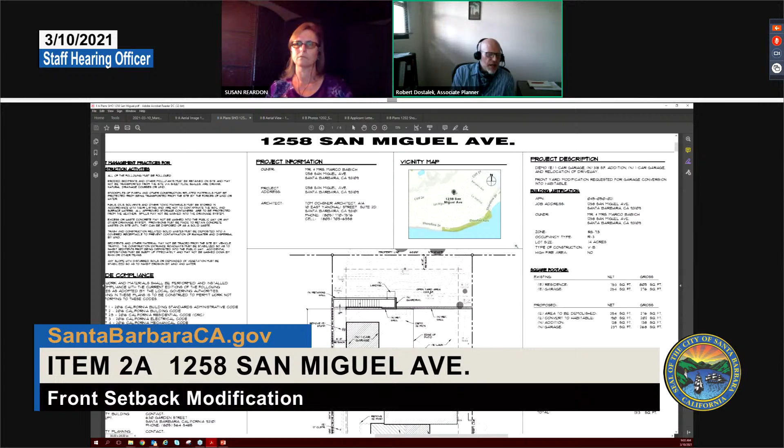Just a little background, if we could focus on the site plan for a moment. The site is currently developed with a 753 square foot single unit residence and an attached 254 square foot single car garage. The attached garage and covered entryway are non-conforming as they encroach approximately 5 feet into the 20-foot front setback.

If we could zoom in a little bit on the footprints of the buildings. The project involves demolition of the existing one-car garage and covered entryway for the construction of a new 318 square foot addition to the residence. The proposal also includes a new detached 237 square foot one-car garage, relocation of the existing driveway, a new retaining wall with staircase, and the removal of one street tree.

The new addition and garage, as you can see, are illustrated with hatching. The new addition would be situated in the same footprint as the existing garage and entryway. The retaining wall and stairwell are included to access the steep rear portion of the lot and to keep the option open of a potential future ADU above the garage.

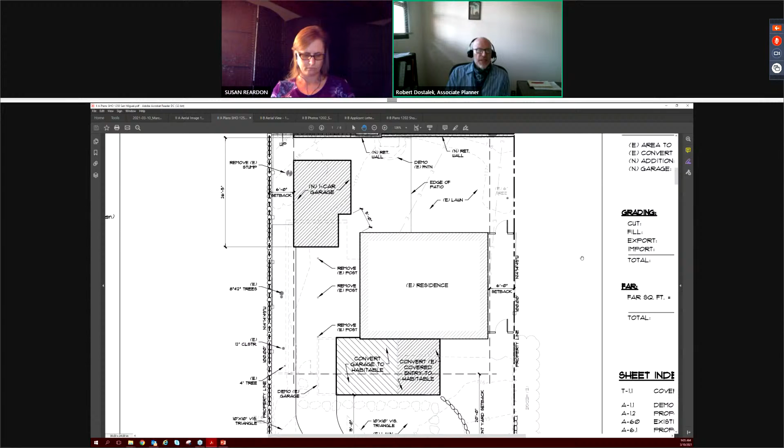For basic zoning and general plan, the project site is zoned E3 SD3 under Title 28 of the Municipal Code. The coastal land use plan designation is residential with a maximum of 5 dwelling units per acre. The properties surrounding the project site are all zoned for and developed with residential improvements. For general zoning consistency, the project would adhere to applicable building height, open yard, and parking standards.

To touch on the street tree, a Mexican fan palm street tree is located in the San Miguel Avenue parkway and is proposed to be removed to accommodate the proposed new driveway relocation. The Street Tree Advisory Committee approved the removal last June, and staff has added a condition to require a replacement tree in a suitable location within the vicinity of the project site.

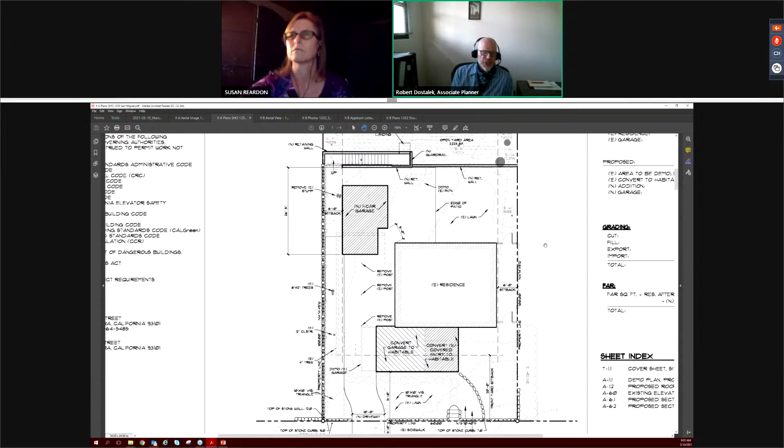To get into the modification a little more, Mr. Russell, perhaps we could go to the floor plan, which is sheet A 1.1.

The existing attached garage and covered entryway encroach into the 20-foot front setback by 5 feet. The proposal involves demolition of these two elements to construct a new 318 square foot addition to the residence. The front setback modification was requested to allow the new habitable floor area to be reconstructed in the same footprint as the garage and entryway, maintaining the same 15-foot setback from the front lot line.

The existing garage structure would be fully demolished to accommodate an architectural roof line more uniform with the existing residence. To replace the removed covered parking space, a new conforming 237 square foot single car garage is proposed in the western rear portion of the property. The existing driveway and curb cut would be vacated to create a new curb cut and driveway leading to the new replacement garage.

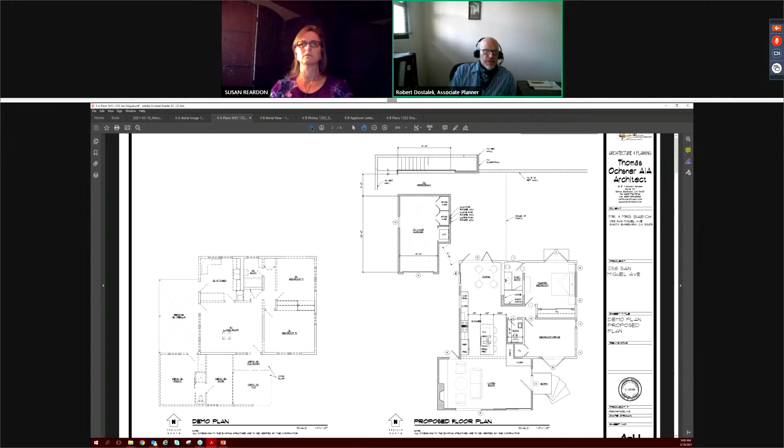If we could toggle back to the site plan for a moment, please. Staff is supportive of the front setback modification, as the proposed addition conversion to habitable space would occur roughly within the same footprint as the existing garage and entryway. Compared to the existing, the footprint of the new addition on the western side would be reduced by about 4.5 feet to accommodate the new driveway approach to the replacement garage. The new addition would result in similar perceived bulk and massing within the front setback, and additionally, the proposed roof alterations would present a more uniform design of the residential structure.

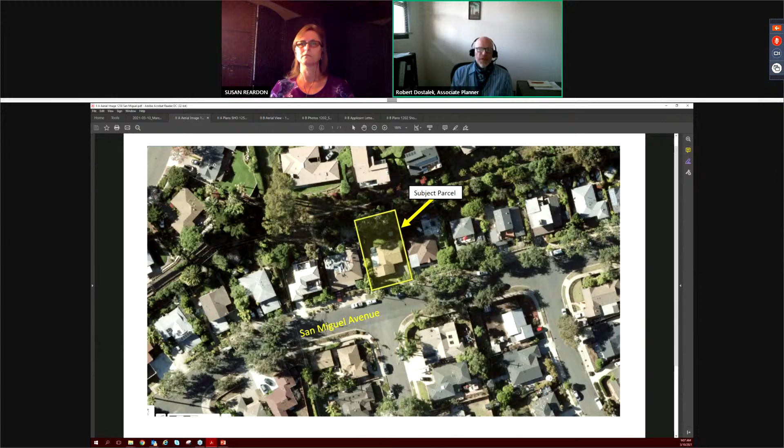There should be an aerial view of San Miguel Avenue in the— yes, thank you. This is a good illustration. As shown here, the reconstruction within the setback would result in a continuation of the established setback theme of other existing residences on the north side of San Miguel Avenue. This is largely due to the significant upward slope in the rear portion of these lots.

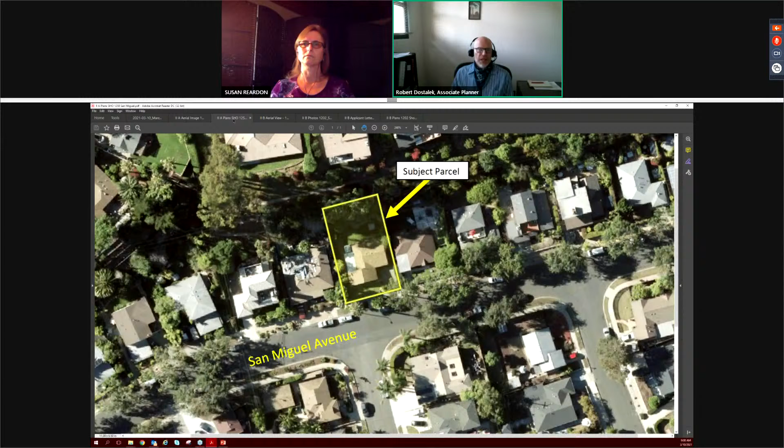Moreover, at 753 square feet, the existing residence is modest in size, and the addition would enhance the livability of the residence. Lastly, the project would relocate the prominent garage and driveway features currently located in the front of the lot to a less conspicuous location in the rear portion of the property.

For design review, the average slope of the lot per city data is 32%. However, the site is not located in the Hillside Design District, so the proposed new addition and garage do not trigger design review. However, the retaining wall proposed behind the garage exceeds 6 feet and is subject to design review by the Single Family Design Board. But due to its limited visibility from San Miguel Avenue, staff is comfortable handling the design review for the retaining wall and stairwell safety guardrail at the top administratively at the building permit stage.

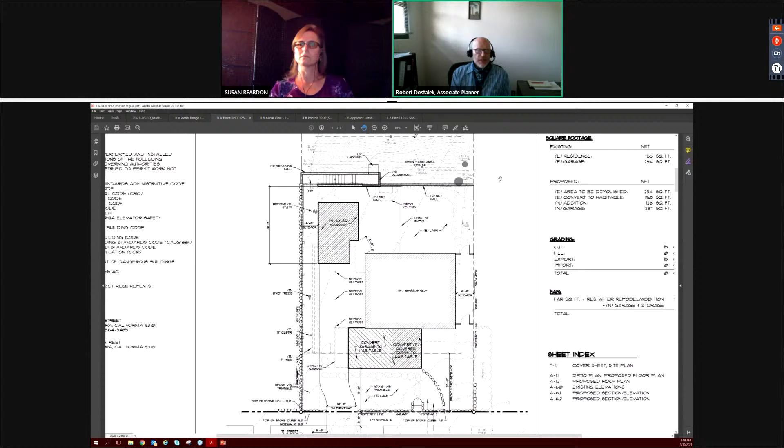For environmental review, the scope of the entire project can be found categorically exempt from further environmental review under sections 15303 and 15305 of the California Environmental Quality Act. To sum up, with the ability to make the findings for the front setback modification, staff recommends the staff hearing officer approve the project with the added condition. That concludes staff's presentation.

Great, thank you. I have no questions right now.

Mr. Ochsner, if you'd like to turn on your webcam and your microphone and provide any additional comments you may have. I thought that was a great presentation by staff. Robert, thank you. I'm available for questions.

Okay, great, thank you. I do have a question regarding the existing driveway. The plans do note that the driveway will be removed, so I assume that means the curb cut, and does it also mean the existing asphalt?

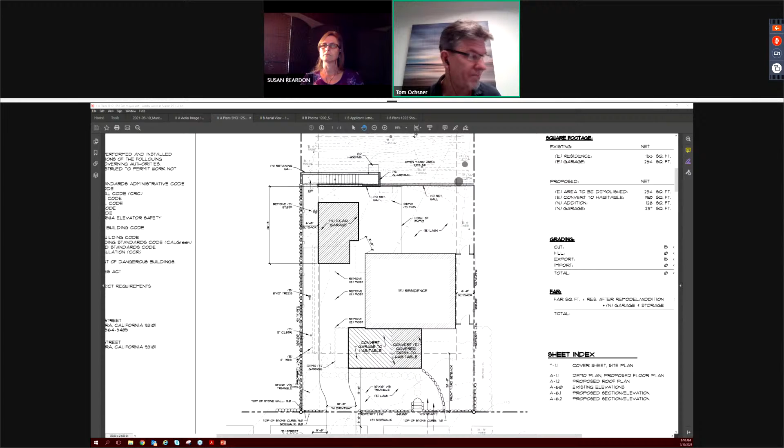Yes, so we don't have an application into transportation for the road encroachment permit yet. We do have a landscape architect that is coming on, but that curb cut will be removed, and the frontage will be restored in conformance to the transportation department's recommendations.

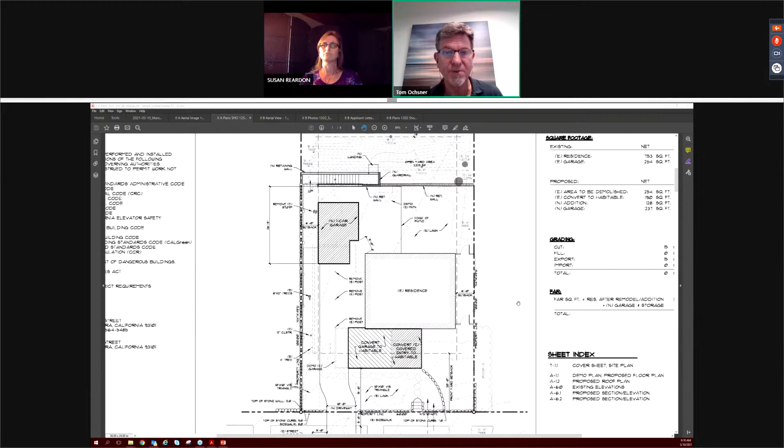Okay, and then what about the driveway paving on the private property? Yes, that will be removed, and a landscape architect is looking at that now. We do intend to turn that into an entryway, so it'll be landscaped in accordance with what the front of the house might want. Okay, great. Thank you. That's all my comments right now.

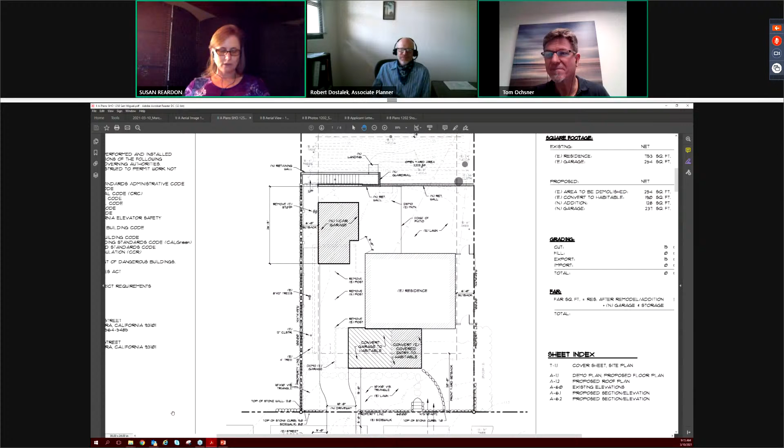Mr. Ochsner, have you reviewed the condition staff proposed in the staff report, and do you understand and agree with it? Yes, I see your head shaking. Yes, we do. Okay, great. So with those two added conditions and the originally proposed condition by staff, I can make the finding as outlined in the staff report and approve your project.

My action is appealable to the Planning Commission within 10 calendar days, and they also have overview authority of all my actions. If they felt this warranted additional review before them for some reason, they could appeal it up, or they can call it up during that same 10-day appeal period. And if either of those would happen, Mr. Dostalek would contact you.

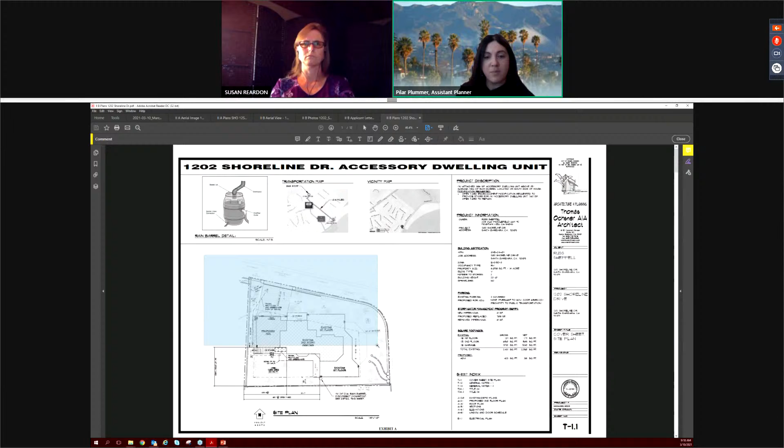In general, accessory dwelling units are under state legislation and are typically reviewed ministerially. However, in the case of this project, we are looking at it as a discretionary hearing and a public hearing due to the open yard modification request associated with the stairs. The project does include new stairs that will encroach into the existing open yard area. The property currently contains 1,260 square feet of open yard area, which is consistent with the zoning ordinance in Title 28. However, the stairs that provide access to the accessory dwelling unit will encroach an additional 98 square feet, which will reduce the existing open yard area to 1,162 square feet.

Staff is generally supportive of the open yard modification request to allow the reduction of the open yard because the encroachment is relatively negligible and it serves the purpose of accessing the accessory dwelling unit. In addition, the proposal conforms to the city's accessory dwelling unit ordinance that allows for the open yard to be 800 square feet with 15 by 15 dimensions on lots of 6,000 to 7,999 square feet. Although this ordinance is currently only in effect in the inland areas of the city, it was approved by City Council citywide and is anticipated to go into effect in the coastal zone after certification by the Coastal Commission of this local coastal plan amendment, anticipated in summer of 2021.

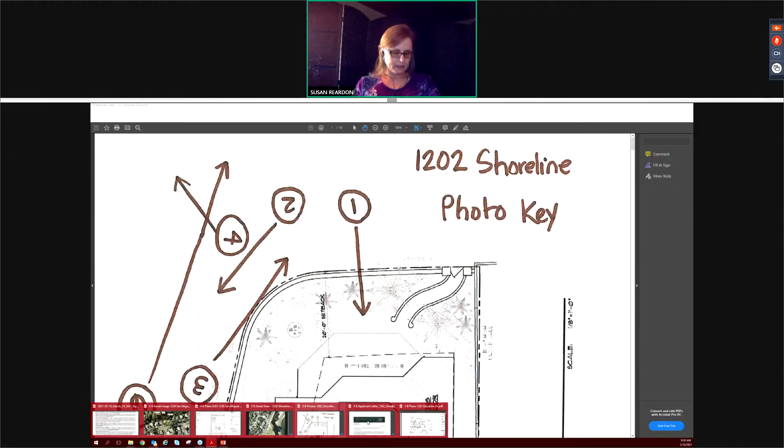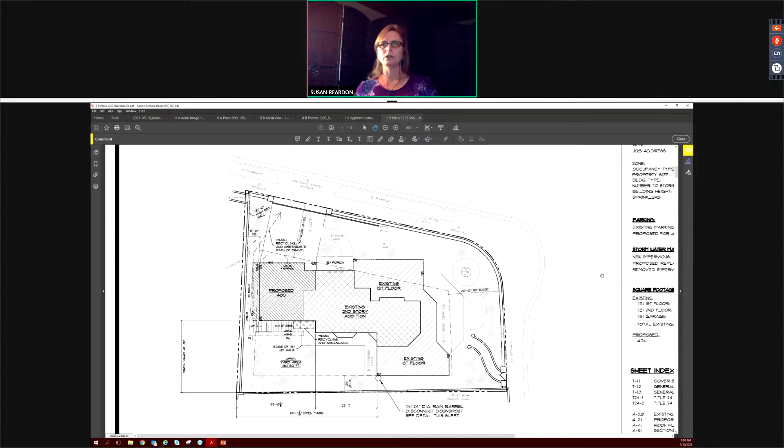Okay, great, I will close the public hearing. I went out to the site and looked at the property, and in regards to the ADU, as I stated at the intro of the public comments, the state has taken away a lot of the city's authority over ADUs in the interest of providing additional housing to residents of the state. Mr., if the staff and the applicant would like to turn on your webcams, I can see you.

Great, thank you. So a lot of the issues regarding the ADU are not relevant at this time. And in addition, the private view easement is a private matter, so that's something I won't weigh in on, given it's private, and also given that I have no authority over the ADU.

My hearing today is in regards to the requested open yard modification with the access stairway encroaching into the open yard. The extent of the encroachment is very minor, as staff said, it's less than 100 square feet, and the end result of the open yard area is still about 93% of what's required. So the request is modest in scope, and it is consistent in that it provides an adequate area for open yard on the site.

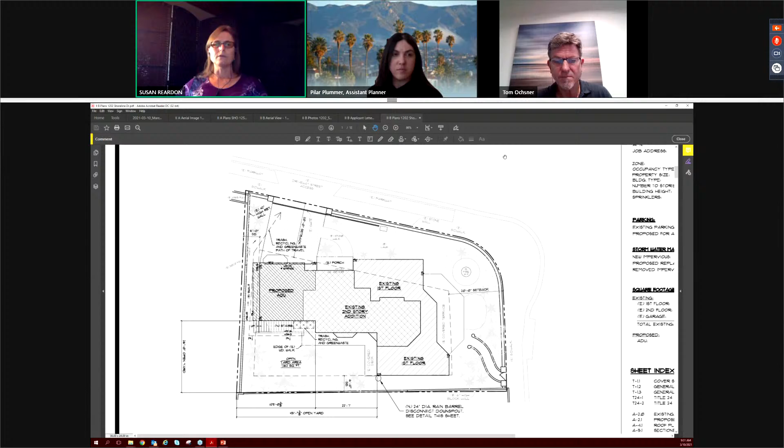In addition, this property is located across the street from Shoreline Park, which provides additional area for outdoor enjoyment.

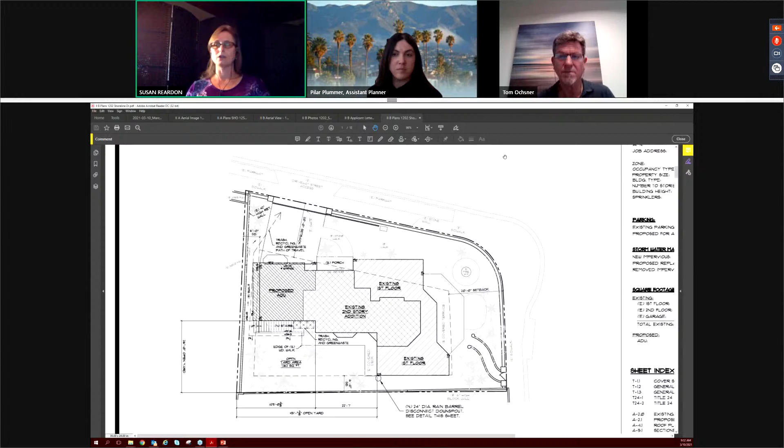With that, I can make the findings outlined in the staff report and approve the project. Staff did not propose any conditions of approval in the staff report, and I don't need to add any conditions of approval in order to grant the open yard modification. So your project is approved as submitted.

My action is appealable to the Planning Commission, as I said on the earlier project, within 10 calendar days. They also have oversight authority of all my actions, and if they felt this warranted additional discussion before them, they could call it up during that same 10-day appeal period. And if either of those would happen, Ms. Plummer would contact you.